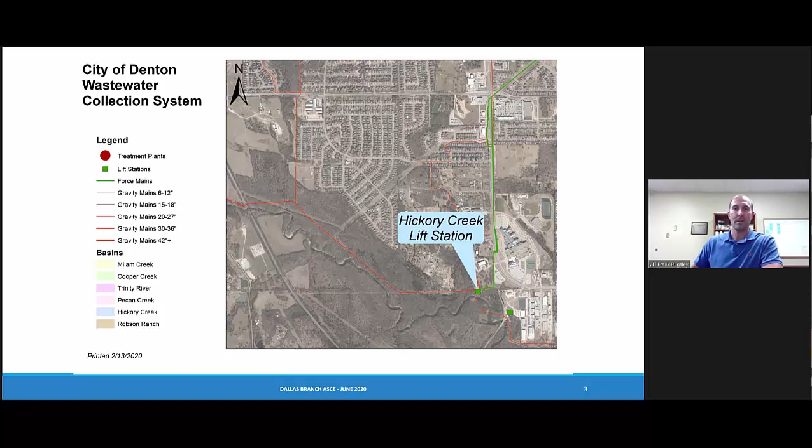As of today, only 2 of those pumps are functional, and it discharges to a 24-inch diameter pre-stressed concrete cylinder pipe force main that is about 12,000 feet long. The average daily flow at this lift station is 3 MGD.

In addition, in the collection system just upstream of the wet well, there are no stop logs or no valves to isolate the lift station in the event of any kind of failure inside the dry well, which is what we've experienced and what we'll discuss here shortly.

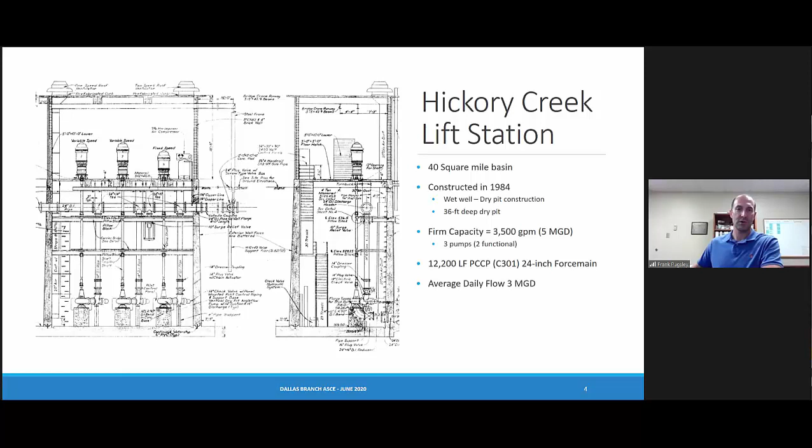So in February 2018, pump number 3 failed. The actual pump casing that contains the impeller was broken by what we believe to be a piece of concrete that was ingested by the pump. And that resulted in a sanitary sewer overflow of about 720,000 gallons. In December 2018, a few short months later, we had an electrical anomaly, which we believed caused a surge in the force main, causing a force main rupture. That resulted in a 300,000 gallon sanitary sewer overflow.

About a year after that, Thanksgiving of 2019, we had another similar electrical event at the facility that caused another surge and also caused a failure in some of the mechanical piping in the lift station, and we had about a 490,000 gallon SSO. Then in March 2020, the motor bearings, the pump bearings in the number 1 pump failed, and we did not have an SSO at that time because the second pump was able to take care of the flow.

Then in April 2020 of this year, we're actually under construction right now to replace this lift station. It's long overdue, but the contractor was implementing some bypass pumping, and their plug that they set in our 27-inch vitrified clay tile pipe actually cracked the pipe, and the plug became dislodged and slid into the wet well, blocking the intake to the pumps. And that caused a relatively small overflow of 7,500 gallons.

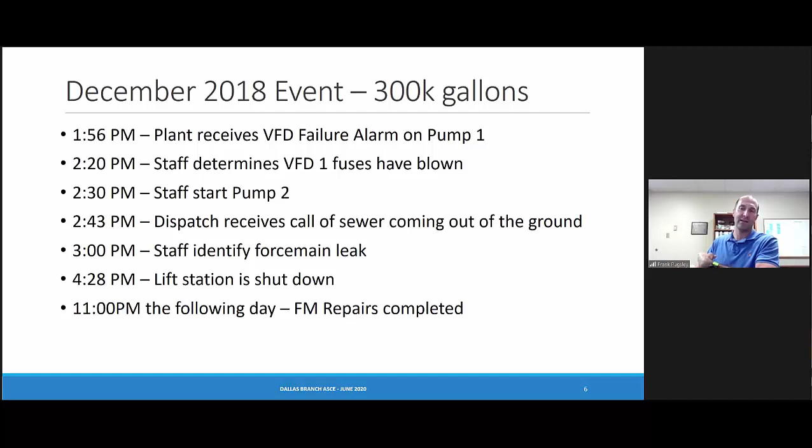So also in that time frame from 3 o'clock to 4:28, we still had flow going through the force main. We weren't losing everything, but we were trying to keep as much overflow contained out of the creek and into our collection system as possible while we decided on our course of action.

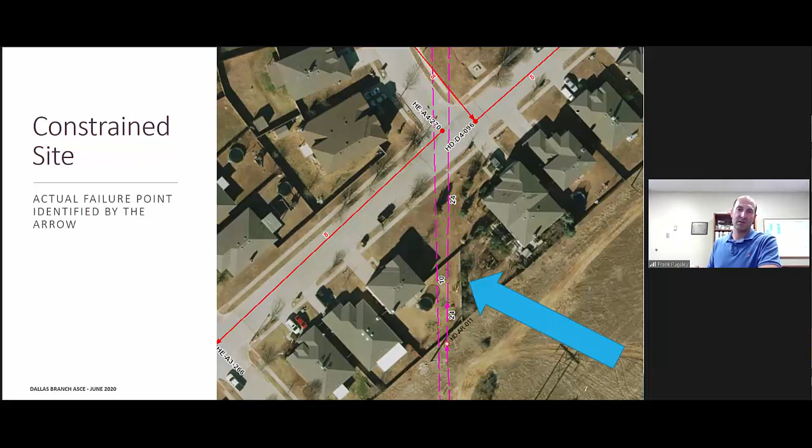And what we theorize caused this failure here is the homeowner had planted a significant amount of trees in the easement over the last many years, and we believe those tree roots may have intruded, impinged on the pipe joint a little bit and caused some failures in the mortar coating and created a weak spot there. And it just happened to be when we started up the constant speed pump this day that was the last straw on this pipeline.

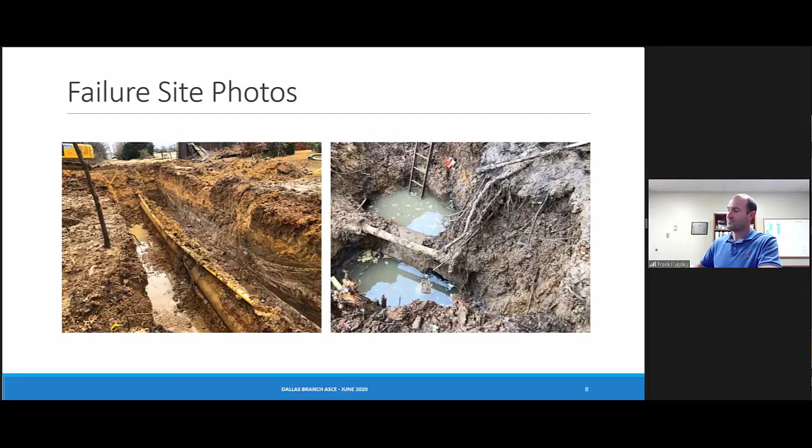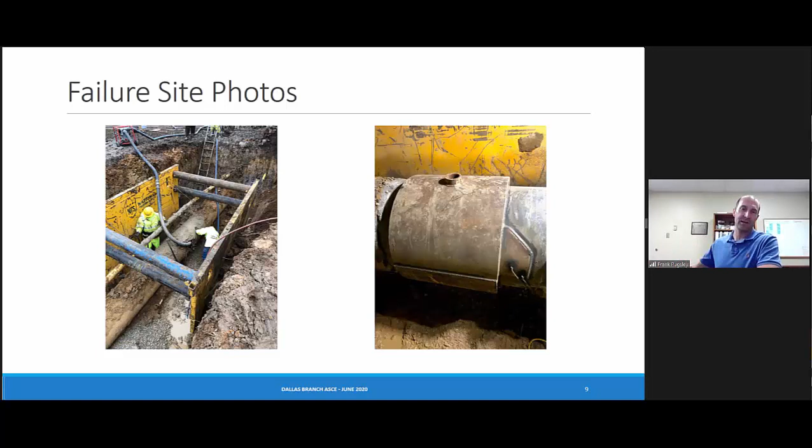That next day, I mentioned we were able to have it repaired by the next evening. Here's a couple photos. The one on the left are the 2 contractors from Rangeline Pipe Services pumping down the pipe so they can complete their cleaning and welding. And the picture on the right is the final installed butt strap around the pipe joint, as well as the additional welding over the failure point and the port on top so we can regrout that part. And then a concrete diaper is poured around that piece. So we repaired the force main, and we're able to go about our business after that.

Some important things that we learned during this event, as I mentioned, we had several 100,000 gallons of overflow. We did implement a temporary bypass solution. We called out a rental company. They set pumps and ran hose to the Upper Trinity lift station. It turns out that you really can't drive across bypass hose, so we actually had to shut down a street for a couple of days, and it's a popular cut through in Denton, so we definitely heard about it from our residents and from council regarding the impact to the residents in this situation.

And also, as we were overflowing, as I mentioned, the lift station is directly adjacent to a creek, Hickory Creek. Whenever wastewater discharges into a receiving stream, it can result in a dissolved oxygen crash in the stream. Fortunately, this was wintertime when dissolved oxygen is a little higher, but what we implemented was a sparging system with several small gasoline-powered 2-inch stormwater pumps with just a suction line dropped into the creek, and just discharging right back into the creek to help agitate the water and incorporate a little bit more oxygen if we can in an effort to prevent any fish kill or as little environmental impact as we can.

Over the course of these couple of days, the TCEQ did come visit us, take a look at the overflow, and wrote the report. And we got that back a few months later, and we were assessed, I believe, a penalty in the $13,000 to $15,000 range for that.

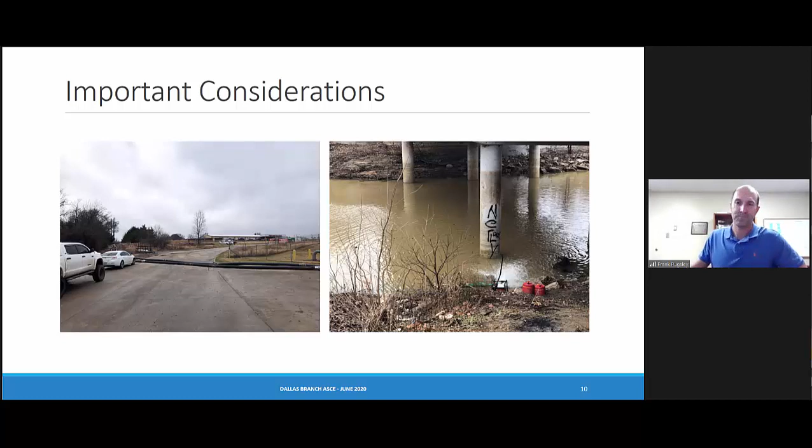After this event in 2018, we put our heads together and decided that the response was a little slower than we would like, and that, of course, the failure occurred in the afternoon. I believe it might have even been on a Friday, and the rental company we called is in South Fort Worth. So it took them what felt like a very long time to make it from South Fort Worth with bypass pumps and the bypass hoses. We decided it would be a good practice for the city to own a lot of our own equipment so we can implement these ourselves.

So what the director prior to me did, with our recommendation, was purchase a mile of 10-inch lay flat hose in 8 segments. They come on a big hose reel. And we also have a hydraulically operated unroller so we can actually unfurl the hose and lay it out when we need it. We purchased a new 6-inch pump and a new 8-inch pump to complement the 10-inch pump we own and the 4-inch pump we own.

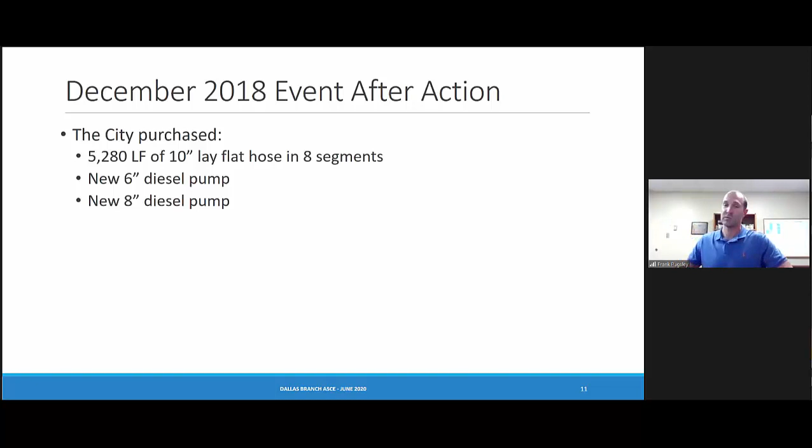So that brings us to November 2019. Again, that was another electrical anomaly, 490,000 gallons. So we call this our Thanksgiving 2019 event. This was Sunday, November 24th, the Sunday before Thanksgiving last year. We got a call from our operators at the plant with another issue potentially at the Hickory Creek lift station. About 10 a.m., some of our staff mobilized to the site quickly, and what they discovered was wastewater spilling out of the ground level door out of the dry pit side of the lift station. So it's pretty much a worst case scenario for us in that sense.

We immediately contacted Upper Trinity, the TCEQ, and our city manager's office and public affairs office because we knew this was probably going to be a significant spill. Upper Trinity has been very gracious in helping us out and accepting our wastewater flow in some of these situations, but we understand that they don't have an unlimited capacity, and we need to be good neighbors as well and not take advantage of their generosity. We again contacted the rental company Sunbelt to provide us bypass equipment. We called and said, please bring us exactly what you brought us last time.

And by 3:59 that afternoon, we had set up a bypass pump in a manhole near the lift station with our own hose going to Upper Trinity. It's not a very significant bypass, but we were trying to minimize the overflow as much as we possibly could. By 10:30 p.m., Sunbelt had got their system up and running. This time they brought drive-over ramps so that we could connect the hoses and still let traffic go through. And they had their pumps set up and began bypassing flow to Upper Trinity.

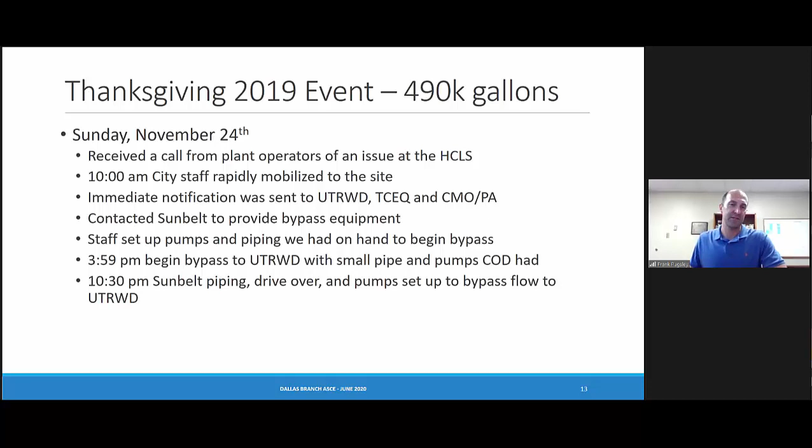As I mentioned, the dry well was completely submerged. So over the course of Monday and Tuesday, we worked 24 hours a day trying to get the dry well pumped down enough so we could actually see what was going on in the lift station so we could determine what the failure was and make a repair. We brought in a contractor. As I mentioned, we don't have any stop logs or any way to stop flow from entering the dry well once there's been a failure.

So what we did is we took one of those large white aggregate sacks. I call them super sacks. I think they hold a ton of sand or gravel. We filled one of those with individual sandbags and lowered it into the upstream manhole in an attempt to plug the flow going into the lift station so we could make an effort to pump it down. We again declared an emergency so that we could work with our purchasing department to make the necessary purchases. We had our public affairs office send press releases, and we continued pumping for those 2 days.

Our environmental services group began doing stream water quality testing in Hickory Creek, both upstream and downstream of the lift station, all the way to Lake Lewisville. Again, the TCEQ visited us, so we walked the project with them. Finally, we were able to pump the lift station down far enough to discover the damage.

And what happened in this case was the surge in this event, the check valve on pump number 1 apparently slammed shut very hard, and then when the pump tripped on and then back off, there was another surge, and it actually broke the discharge elbow off of the pump, and it sheared through the ductile iron 90-degree bend, and it was just laying on the floor, and all the valve and piping stack that was on the discharge side had just slid off and was sitting on the bottom of the lift station.

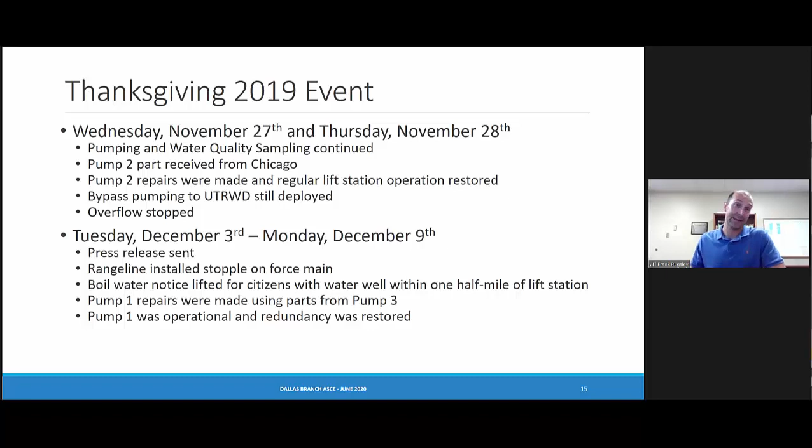I forgot to mention this earlier, but we actually did have to issue a boil water notice for citizens in the vicinity who are using water wells as their primary drinking source. And that week we made permanent repairs to pump number 1 using parts from the old pump number 3 that had failed in February 2018. And we restored pump number 1 to its full operational capacity. And at that point in time, we had full redundancy with 2 pumps at the lift station again. We were very excited. Again, I have some fun photos.

The picture on the right is what our staff discovered when they arrived at the lift station. That's very bad news when you show up and there's 36 feet of wastewater inside your dry well. You can see in the center of the photo, the motors for the pumps are above the natural surrounding ground level, so that's a bonus for us in that we didn't have too much motor damage in that case. Pump number 2 motor did sustain some damage, and we had to send it off to be rewound after this.

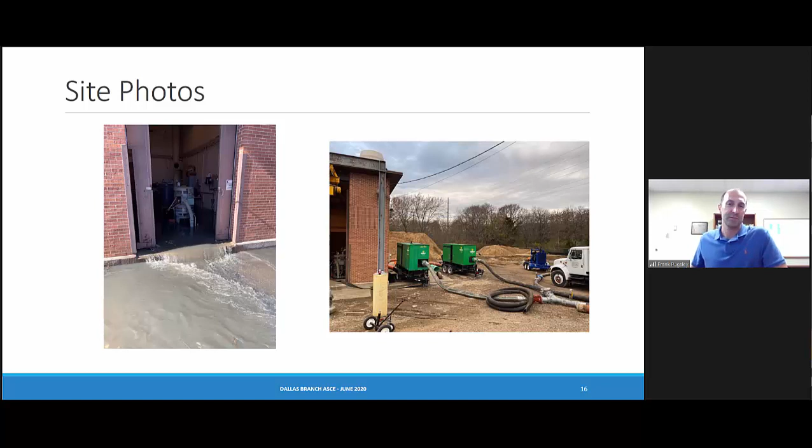The photo on the right shows the bypass pumps that Sunbelt had set up, the 2 green pumps, and then the blue pump is one of the City of Denton's pumps. And the picture on the left, if you recall the section view of the lift station, there are 2 flights of stairs going down. Basically, at this point, we had pumped it down far enough to see the first landing of the stairway.

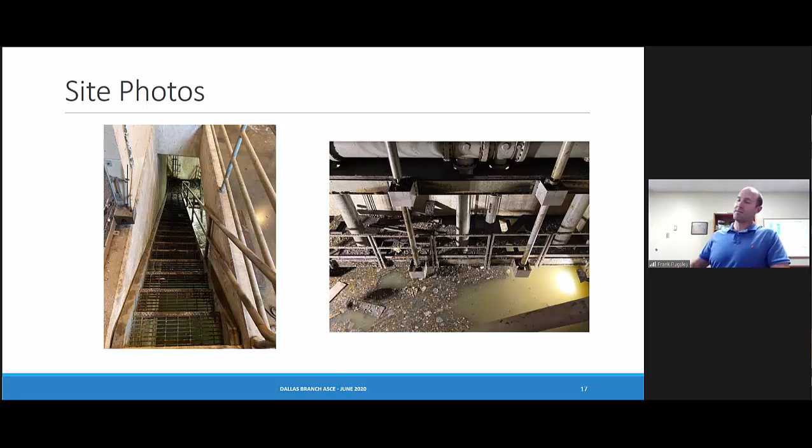And once we pumped it down a little bit farther, you could start to see what was going on inside the lift station. You can see on the right side of that photo, the waterproof, explosion-proof lights are doing great because that light is still underwater. It's still on. We still had about 10 feet of wastewater in the lift station at this point. And we finally got it pumped down enough where we could see the pumps. I'm going to bring up my pointer.

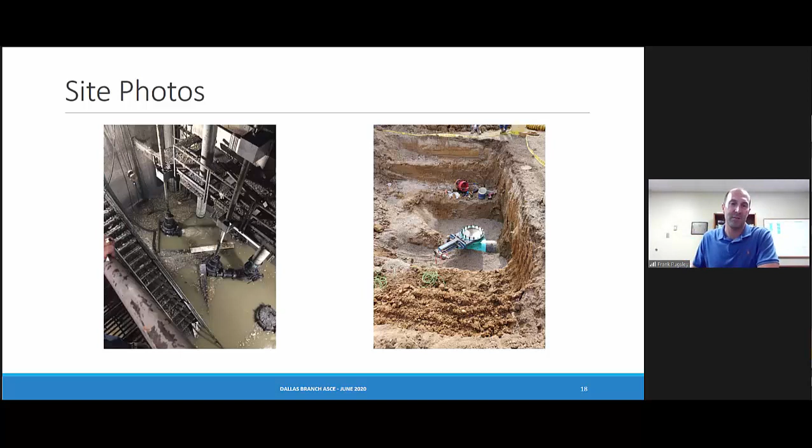Here's a map showing this time where we put the hoses and the drive-over piping. Our lift station is in the top left. We had about 1,200 feet of 8-inch hose in parallel, and we put the drive-over ramps for traffic to pass on Old Alton Road, where we were able to discharge to the Upper Trinity lift station to the southeast.

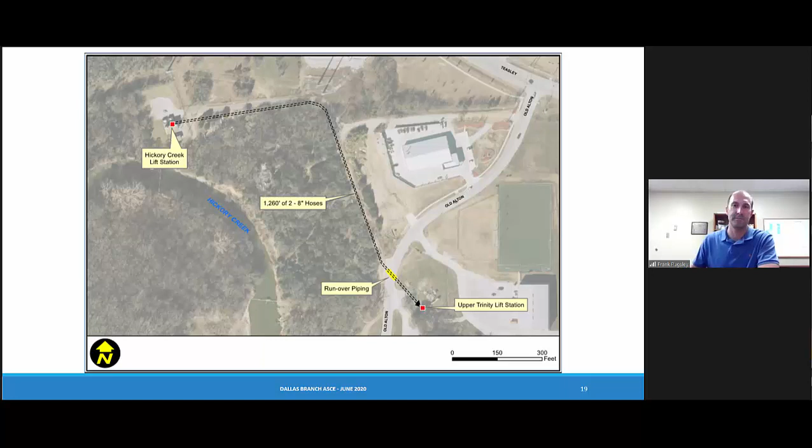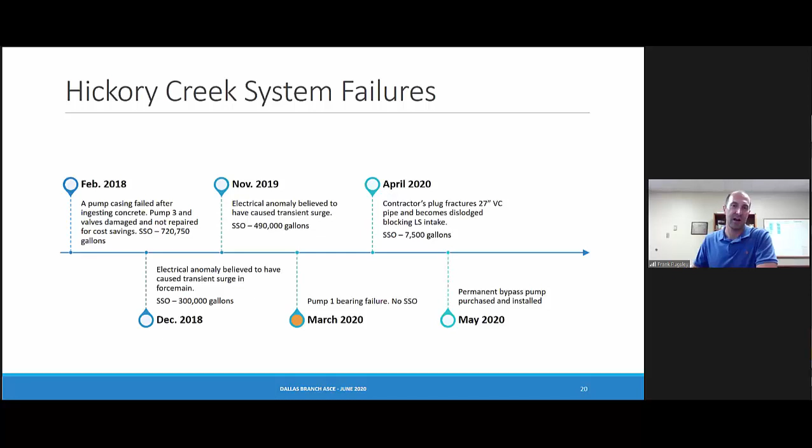All right, back to the timeline. We're going to bring it to March of this year. Pump number 1, the motor bearings down in the dry pit began to fail, and we shut down the pump permanently in March and began crossing our fingers that pump number 2 wouldn't have any issues. And that was followed up by the April failure by the contractor, and then the May installation of our new pump.

So as I mentioned, in March of this year, pump number 1 completely failed. We shut it down permanently and could use it in an emergency. It is unknown how long it would actually run, and that left pump number 2 as our only operational pump for a period of time. As I mentioned before, we're constructing a new lift station right next door, and it has larger pumps that are going to be placed in it. We are hoping to have those on site already.

Due to the COVID crisis, they were held up in Europe for a little while, and I think they finally showed up, but we were able to actually find a matching used pump that is the same exact pump we're placing in the new lift station to purchase as a permanent bypass pump. So we were able to purchase that pump out of New Jersey, and we have temporarily installed it in the wet well of the lift station and run HDPE hard pipe to that stopple connection that Rangeline created for us.

So in May of this year, that pump arrived and was installed, and when we run that pump connected to the VFD in the lift station, we're able to actually get 6.2 MGD at that pump at full speed. So we're very pleased with that permanent bypass solution, and in retrospect, kind of wish we would have done that from the beginning instead of having waited this long. But as we were under construction with the new lift station, we honestly expected the lift station to last a few more months each time prior to each subsequent failure.

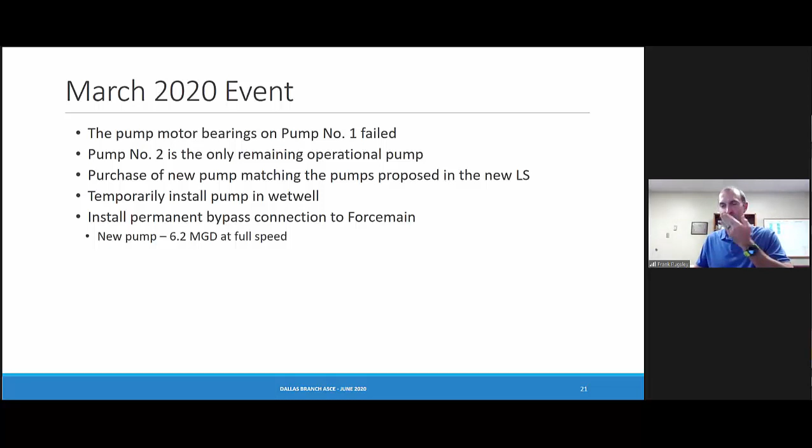Let's get into the dollars a little bit. We've spent quite a bit of money on these 3 events, and this doesn't count the TCEQ penalties and fines that we've incurred. And I don't have the cost of the February 2018 event. But in December, we spent about $115,000 plus our equipment time that we didn't get billed to the job. And that's in-house staff time and rental equipment and repairs. After that event, we purchased about $200,000 worth of bypass pumping equipment. And we haven't accounted for all that cost yet either. We're still waiting on a few pieces of equipment and fittings.

And then in November of last year, we spent about $230,000. And then in March, to purchase that permanent pump and that bypass connection, we spent another $125,000. So all said and done, we've spent $675,000 over the course of basically a year and a half in patching our lift station together.

So after all these events, we had some recurring questions. Each time we had a failure at Hickory Creek, we had to remind ourselves what we did last time and asked ourselves, why are we reinventing this response each time? We need to have a better plan. By the time it happened the 3rd time, we were getting pretty good at it, but we decided that if this happens somewhere else, we don't need to be trying to figure it out. We need to know what we're doing before we get there on site.

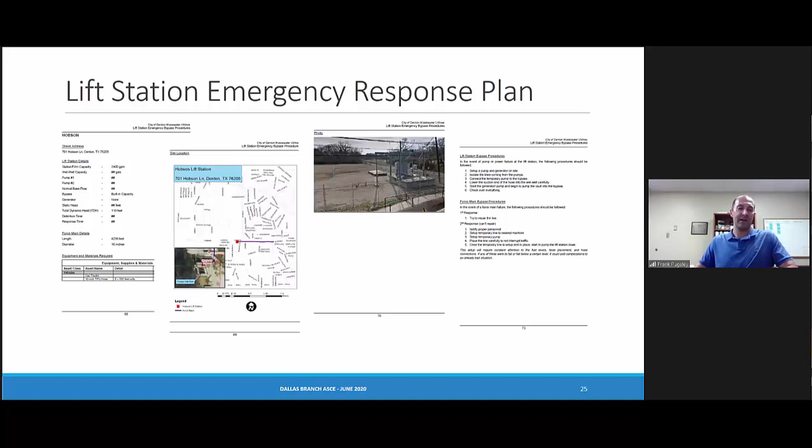And then we have the lift station bypass procedures, what they need to accomplish when they get on site to bypass the lift station in the event of a power failure and/or a force main failure. A power failure and a force main failure could be very different things depending upon the lift station.

So without that kind of detail, our staff would be really struggling looking at GIS maps, trying to follow flow lines to find a manhole where they can go. So based on this, the lessons learned that we've got are to establish an emergency response plan, designate a scribe and a central point of contact for these events. Someone needs to be taking notes in addition to having the incident commander and point of contact.